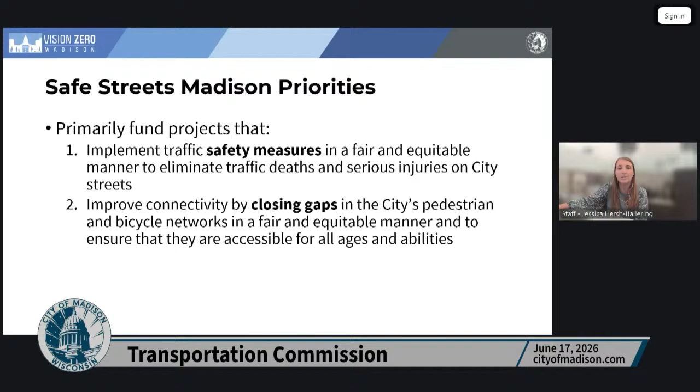The Safe Streets Madison program uses local funds to identify, prioritize, and construct smaller focused improvement projects at single intersections or along a portion of a corridor. These improvement projects target two main concerns: one is safety for all road users, and the other is closing gaps in the pedestrian and bicycle networks so that they are accessible for users of all ages and abilities. Equity is built into these priorities.

Problem locations are then added to our Safe Streets Madison candidate list, and then staff score the severity of the problem, asking questions like: are we seeing severe injury and fatal crashes? Is the pedestrian or bike network gap on a high volume or high speed roadway? And is the problem along a route with high trip generators? Staff then identify a potential improvement to address that problem at every location, and we score the proposed improvement based on how well it resolves that safety problem.

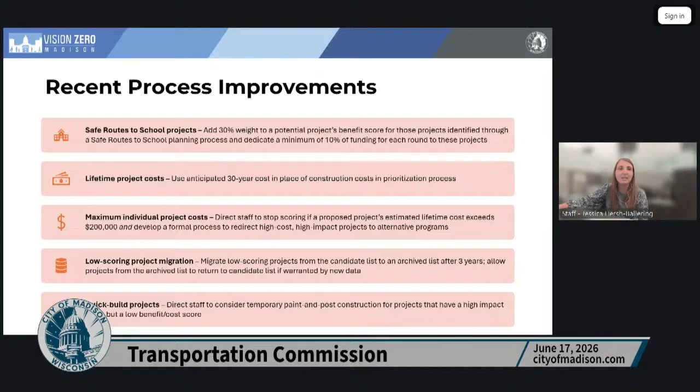Our last process improvement: the TC also voted to direct staff to consider temporary paint and post construction or quick builds for projects that have a high impact score, but a low benefit to cost ratio because of those high construction costs. Typically, these were concrete projects.

So if you look at the recommended project list, you will notice a few quick build projects. The project at Tompkins Road and Groveland Terrace uses flex post bump outs to increase deflection at an existing traffic circle. And at the intersection of Rosa Road, Regent Street, and Anchorage Avenue near Stephens Elementary, we're using flex posts to create intersection bump outs that would shorten the pedestrian crossing and improve safety. Tom's going to go into detail on those projects, but I wanted to mention them here just to note that we did, in fact, include quick builds in this round because of your vote.

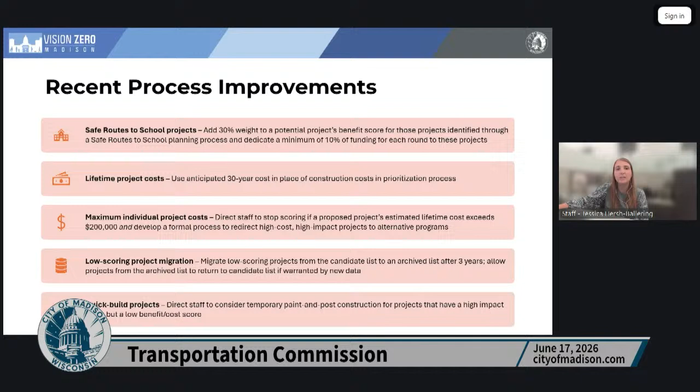I also want to note that doing these projects with flex posts instead of concrete not only makes these projects possible, but it also allows us to complete more projects overall.

Ultimately, that overall benefit score is divided by the estimated 30-year cost of the proposed project. This is also new. It used to be that we just used the initial construction cost, but we voted to have the 30-year lifetime cost in this portion of the ratio.

And lastly, let's talk money. The 2026 capital budget includes just over $1.6 million for the Safe Streets Madison program. When you add in the uncommitted funds from 2025, we have just over $2 million. However, we also have to subtract the estimated costs for approved but not completed projects. These are the projects that the Transportation Commission has approved, but they are still being designed or waiting to be added to an appropriate construction contract.

As an aside, having a significant amount of money that we are reserving for approved but not completed projects is not surprising, and it's not a problem. It's an expected part of the process. As we've discussed, once you guys approve a slate of projects, the additional work that needs to be done before construction typically takes about a year, sometimes longer, depending on the complexity of the design.

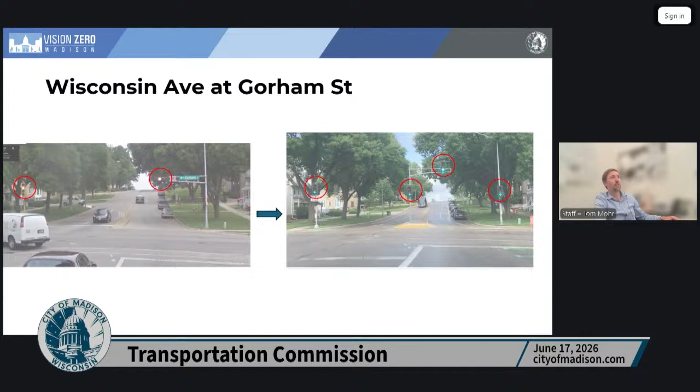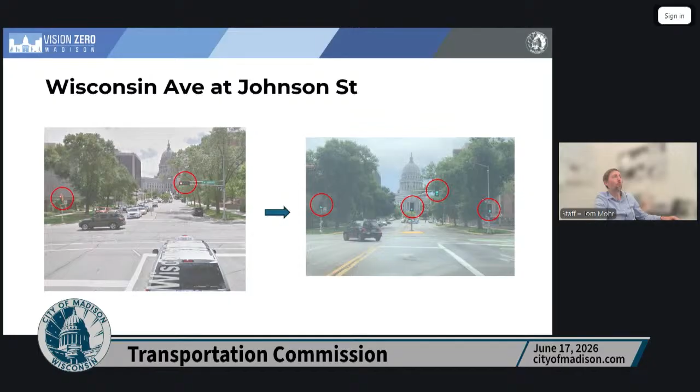This is now looking the opposite direction towards the Capitol on Wisconsin Avenue at Johnson Street. Basically the same thing where we upgraded the signal infrastructure. Next, Baldwin Street, we added bike lanes.

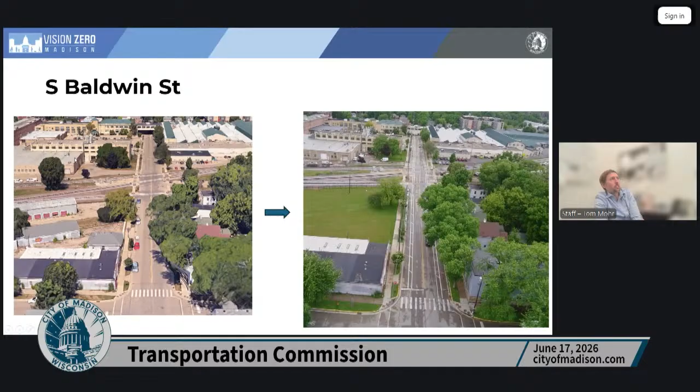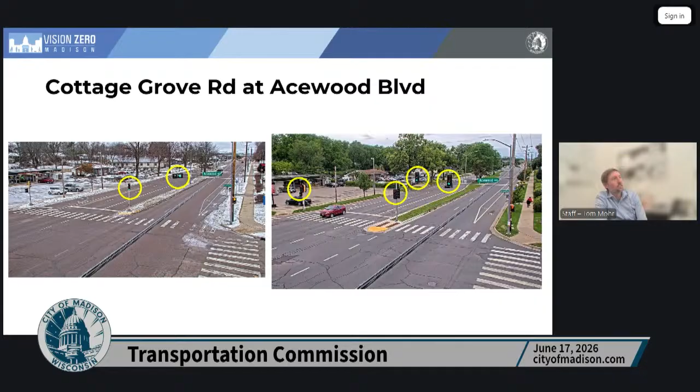We added two projects since this was initially uploaded last Friday. I'll get into both of those, but the 326,000 is a little bit higher than it had been. I'll go through each grouping of projects here.

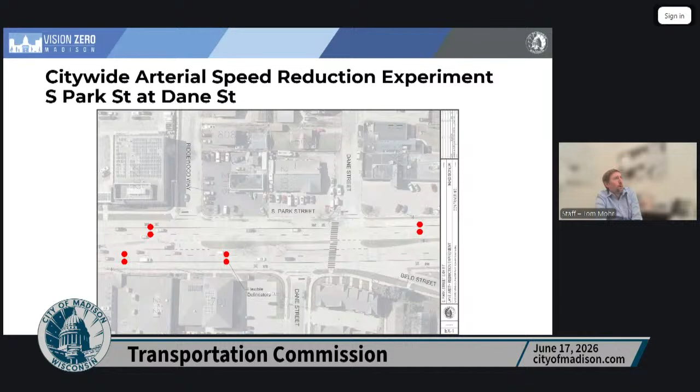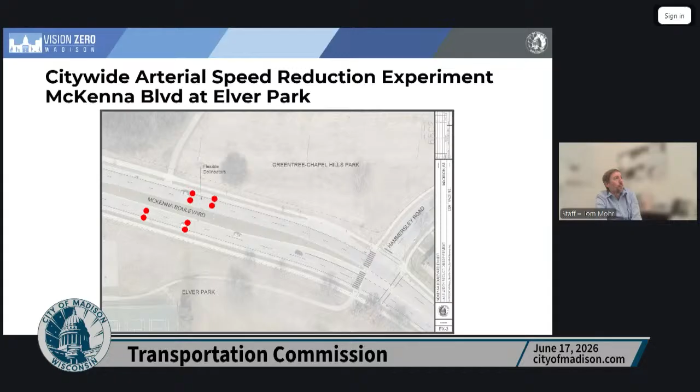This is McKenna Boulevard, just east of Elver Park. And then Northport Drive near Goodland.

Each of these locations weren't necessarily chosen because we thought they were the highest speeding, but we had to choose locations that were near traffic cameras so we can keep an eye on how things are going, monitor the delineators. We didn't want to choose projects that were not visible to us all the time. So we're going to actively watch this while this experiment's going on.

We'll probably keep it up for a couple weeks, a few weeks, depending on how it goes. But yeah, the big thing is going to be looking at the data to see if we want to expand this further.

So we got a few speed hump locations. These locations were typically chosen based off of crash issues. Some of you may remember Swanton Road was discussed in quite a bit of detail about 5 years ago, where

we changed some parking, added islands. We've still seen crashes since then. We've still had speeding complaints. And this is one where we've kind of worked with police, fire, and also Alder Field.

And then this was also identified in the southeast area plan that I think was at the previous meeting. So we've got kind of a dual project here, both on Swanton and on Thompson Drive. A couple speed humps and a chicane.

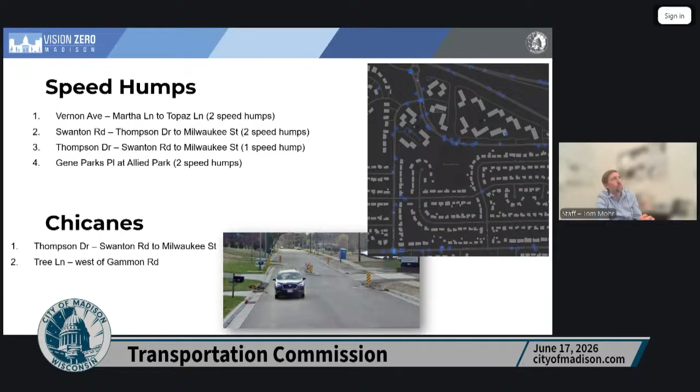I want to call out Gene Parks Place. This is right near Allied Drive. This is part of a neighborhood resource team request.

So this, just wanted to call out, it didn't have the high crashes like the other locations, but because of this location next to the park and there's a lot of kids running back and forth across Gene Parks Place, the neighborhood resource team felt really strongly about this one. So we are including this in this round.

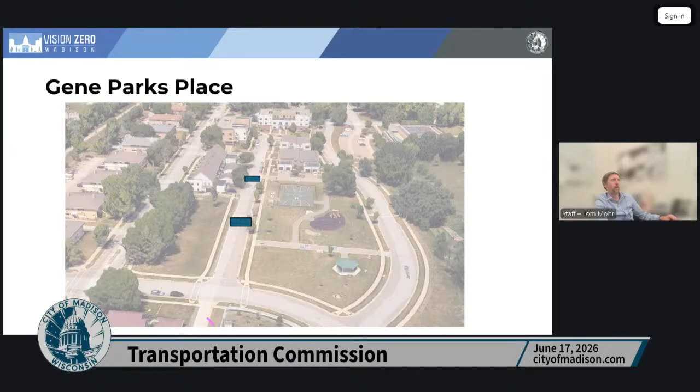For RRFBs, these have always been popular within the program. We've got these locations, 4 locations here, and then 1 location for the speed feedback board, and that's at Park Street near Burr Oak, which we've discussed in the past also. I think I get into more detail here next.

Yeah, so this is, I wanted to go into this one in a little bit more detail to explain this because Monona Drive at Winnequa, so Monona Drive is a 4-lane street, undivided at this location.

So there was some question as to whether we want to continue with RRFBs on these types of streets. I think our stance is that we should continue following the kind of the national guidance on this. This location, it's a difficult crossing for pedestrians. It's near the San Damiano Park.

This has been a long-standing request. There's been a request for a signal here. It doesn't meet warrants. And this is right on the border between Monona and Madison. So Monona has the west side of the street, Madison has the east side.

A pretty long distance between signalized intersections there. So Cold Springs to the south, Buckeye to the north, kind of in the middle. And we've approached Monona about cost sharing on this. Sounds like they're open to the idea, but they still need to go through the formal process for that.

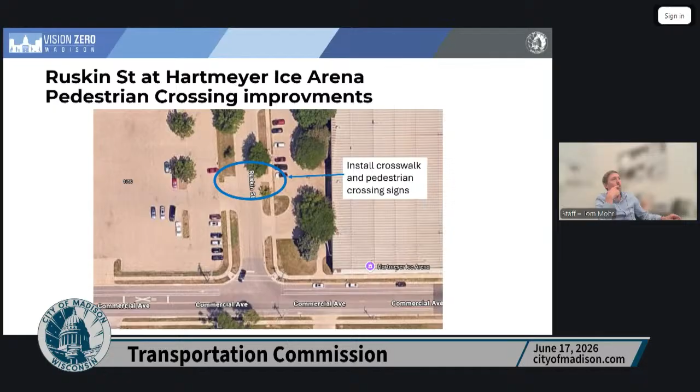The Ruskin Street crossing is for the ice arena. There are events at the ice arena, and there's really no crossing identified that people tend to use. Now Ruskin is a through street, where in the past it was just a cul-de-sac. So we thought it was important to call out that crossing to get people from the parking lot to the main doors.

This is Mills Street, which we've discussed with the Regent Street reconstruction project. The area to the south we had brought previously through Safe Streets Madison, and the area to the north would get bike lanes with the Regent Street project. So now we're looking at the connection. This is on the All Ages and Abilities bike network, so this is definitely something we want to do.

We would have to go through the public hearing to remove the RP3, the residential permitted parking within this area. There are different processes to do that. We thought the best way would be to come here first, get the approval contingent on that RP3 public hearing, so then we'll go through the formal public hearing where we can discuss the rate of use of the RP3 and the effect that would have on that program.

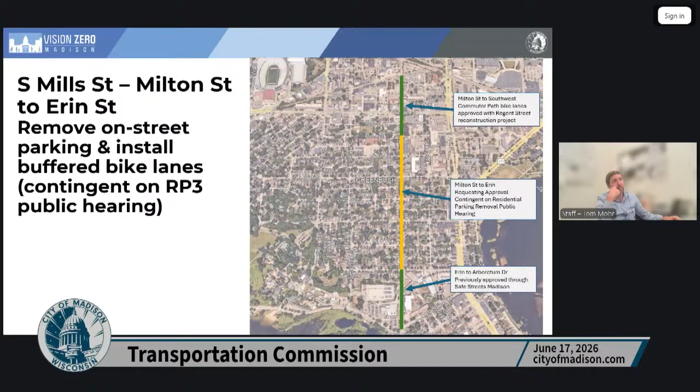But overall, it's a pretty straightforward project. It requires removal of the on-street parking to get the bike lanes in. I think it makes sense to do it now with the Regent, or in anticipation of the Regent Street project. We could possibly even get it in later this summer.

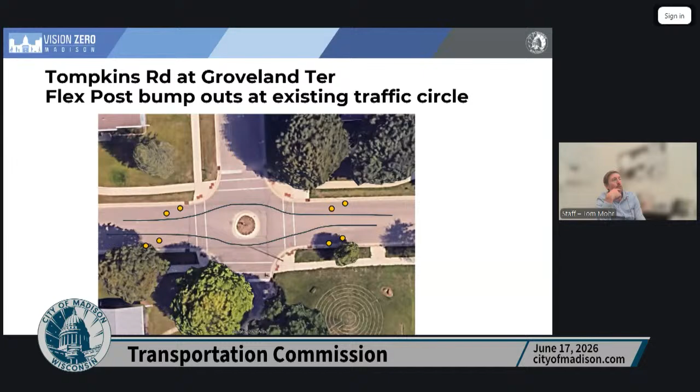This is the flex post that Jessica mentioned earlier, at Tompkins and Groveland Terrace. This traffic circle has been in for quite a while, but whenever we design these traffic circles, they're designed with the thought of there being parked cars on the street. In places like this, where there tend to be no vehicles parked, drivers can just go down the curb line, not really slow down, and avoid the traffic circle. So we plan to add this, especially at this location because of the Flom Road reconstruction, which is going to add traffic on Tompkins. We'll probably look at getting some before and after speed data with this as well, and the delineators will require drivers to deflect more around the traffic circle.

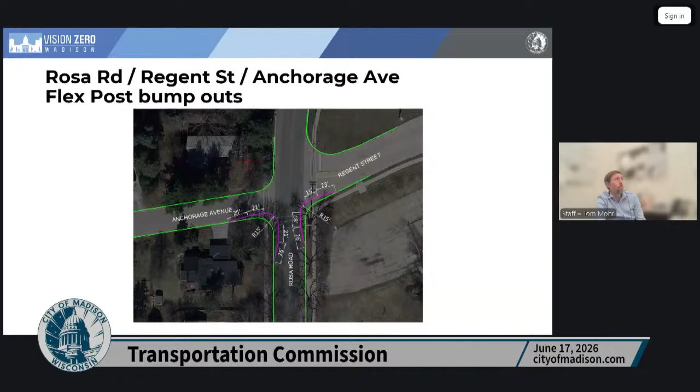So that was the overall list. And we just have the recommended action, but I think that is the end of the presentation.

Yeah, thanks Tom and Jessica. Aiden, do we have anybody registered to speak on this item? Yes, we do. First, we have Nicholas Davies of Richard Street, who neither supports nor opposes but wishes to speak. Oh, actually, I'm sorry, this is for item 3.

So do we have anybody registered for item 2? We do not, nobody for item 2. Okay, alright, then let's go to comments or questions for staff.

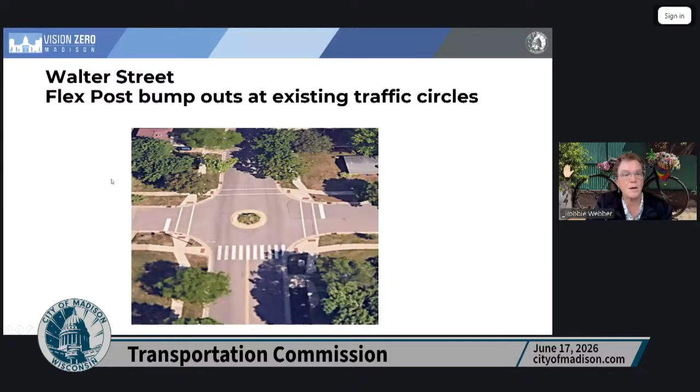Robbie, go ahead. Yeah, I just wanted to clarify that there might be an error on your list. Mineral Point between Segoe and Whitney Way is actually 35 right now, so if you're dropping it down to 25, that's a 10-mile-an-hour reduction instead of a 5-mile-an-hour reduction.

Okay, yeah, thank you for pointing that out. We'll check on that, make sure that's correct.

I mean, the speed limit changes at Segoe. As you go west, it goes from 30 to 35. It also gets super wide. Yep, so I imagine you do have speeding problems there, but just an FYI, it's 35 right now.

Okay, thanks, we might want to relook at that one then. You'd still like the speed reduction? You just want to look at how much, Tom? Right, yeah, yep.

So all these speed reductions are pretty simple projects that don't take long at all. A lot of them are only a couple signs, so we might just want to pull that one and take a second look at it and then bring it back rather than trying to do it here during the meeting.

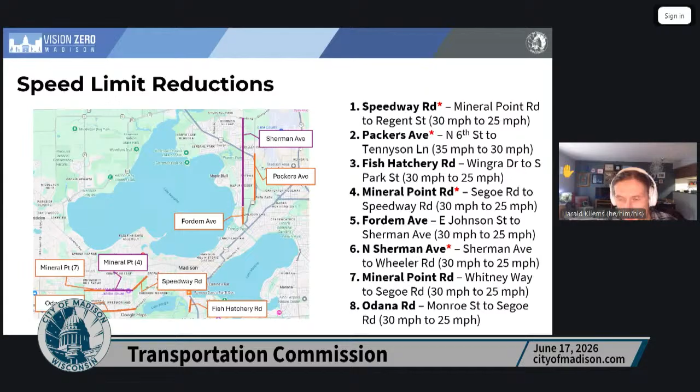Thank you, Chair. Thanks, Tom and Jessica. I'm looking at the overall spreadsheet and the total benefit cost scoring and trying to think about what I'm seeing there. So again, we have a pretty large spread where the highest ranking project is 124, the lowest that's still recommended is like 3, and there's a lot of single digit scores.

It seems like some of the flex post things are those most affected by the 30-year cost, and that's why they end up with such a low cost benefit number. And I think there's also some inconsistency in how the 30-year cost is calculated for those, where sometimes it seems a factor of 20, and sometimes it's a factor of 10 from the project cost to 30-year cost. So I'm curious about that part.

So what's your take on the changes we've suggested with the school stuff? All the high scoring ones are reducing the speed limit, which has a low expected impact score, but it's just so cheap. I think we've seen that before. But for some of the other projects, it does seem like the score distribution has changed a little bit. Can you comment on that?

Yeah, that's a good question. The flex post is a good example where we're not really sure. We're kind of assuming we're going to have to replace it pretty close to every year, but maybe that won't be the case. There's still a question of whether we allow these to just stay up through winter and hope they survive, or take them down to reuse next year. So there's some question with that, and getting them out there and seeing how it goes is going to be important. Really it's just our best guess right now about the long-term cost with the flex posts.

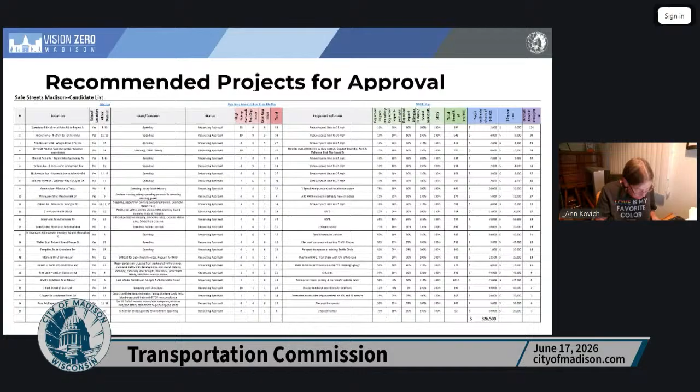Okay, comments or questions? Harald? Oh sorry, yeah, I was going to make that motion to approve the list as you described. Is that in order? All right, Alder O'Brien, is that a second? Yeah. Thank you. Harald, did you wish to speak to your motion?

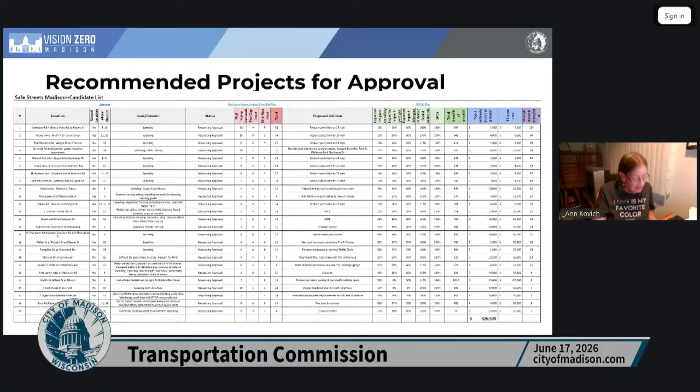It's a good list of projects. Let's get them built. Thank you. And I have a particular fondness for the RRFB on Moreland Road because I live near there, and it's really hard to cross that street. I see lots of kids having a really hard time crossing, so I'm particularly fond of that request.

Okay, any discussion? I'm going to assume unanimous consent vote unless anybody wishes to vote no or abstain. So please raise your hand. Okay, and I'll write that up for Aiden right after the meeting so I don't forget from my scratch notes there.

All right, thanks so much everybody. These are great projects, and as we all know, there's many Safe Streets Madison projects on the list, right Tom? So it's great to see these. I think one of the benefits of the changes we approved back on April 15th is that we will likely see more projects because we're pushing the higher dollar ones off in other directions, so we're able to accomplish a little bit more. I also think the Safe Routes to School enhancer is really helping with those projects as well. Thanks to staff for bringing those enhancements forward, and it's really great to see them used this very first time. So round of applause to staff. Thanks everybody. Yep, thank you.

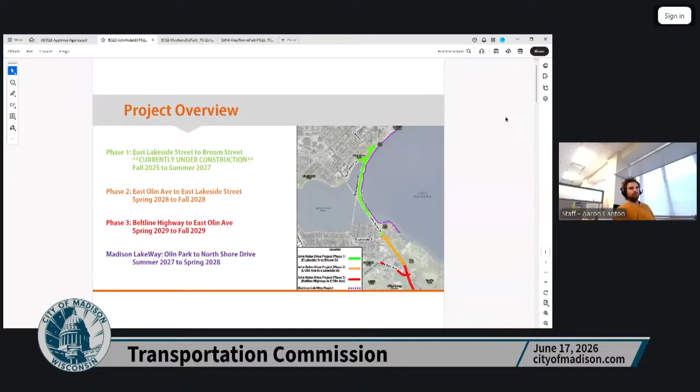Does that look any better? Well, I think you've just got the slides, but we still see your taskbar and everything. If you just make the slide full screen. Oh, here, I can also zoom in too. That might help. That helps. Okay. Well, certainly let me know if anything needs to be zoomed in as we go.

So thanks everyone. This is the John Nolen Phase 2 project. Bringing this informationally to the commission. Likely we'll be back with full geometry approval at a later date.

So shown here is an overview of all the phases, current and future, for John Nolen Drive. Phase 1 is in construction along the causeway. Those limits are just north of Lakeside Street through the Broom Street intersection, currently under construction. Progress is going well, expecting a significant phase switch to start work on the Lake Monona side, likely next month in July.

That project is going to be continuing construction through summer of 2027. Phase 2, the focus of today's meeting, will be from just north of Olin Ave to north of Lakeside Street, and that is currently scheduled for 2028. Phase 3, scheduled for 2029, will be John Nolen from the Beltline through the Olin Ave intersection, as well as Olin Ave itself from Wingra Creek to John Nolen. And a note that Madison Lakeway is planning a portion of their park enhancement along the Lake Monona shoreline 2027 through 2028, on the coattails of the engineering project on the causeway.

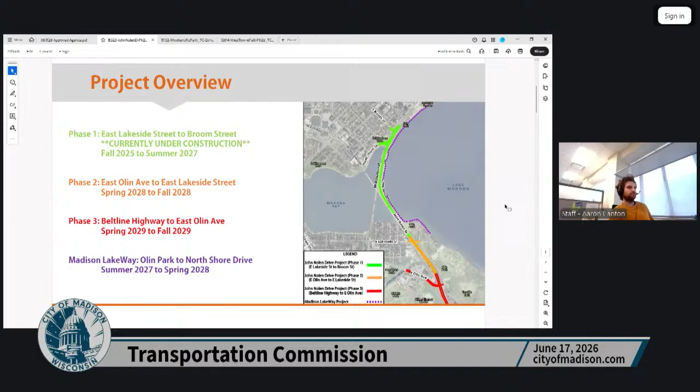So for phase 2, the focus of today, this is an overview exhibit, roll plot for that whole phase. It's a bit smaller and less to chew on than the first phase, which had a lot going on, but still obviously a significant street. The project will include pavement replacement across the full stretch. The limits are going to be north of Olin Ave, so this phase won't get into the Olin Ave intersection, and then through the Lakeside Street intersection, tying into where phase 1 will leave off. This phase 2 will include the Lakeside John Nolen intersection, which we'll look at a zoomed in exhibit later in the presentation, as well as the Sayle Street and Lakeside intersection.

So in general, the project is largely motivated by pavement replacement. That pavement is beating up faster and faster every day, and we need to get that replaced. There is one bridge structure on the project over Wingra Creek. That bridge is actually in pretty good shape, and we're planning for some surface level and wing wall repairs, but not a full replacement of that bridge. In general, the project is planning to put back the same number of lanes that exist out there today on this phase. The lane drops will be brought up to current WisDOT design code, elongating slightly per the standards. And then we also have some bike and ped improvements, largely at the Lakeside intersection, that we'll get into.

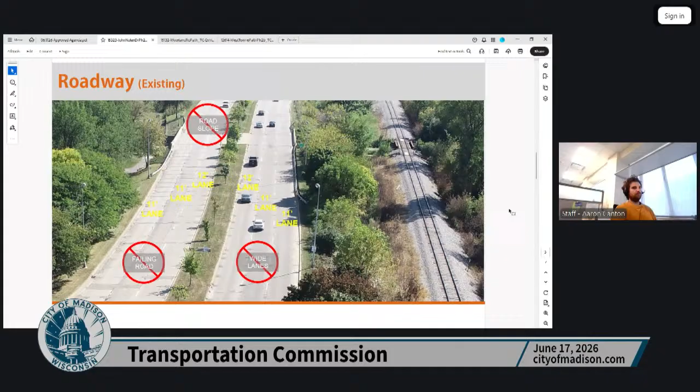So zooming into it, first off, a look at the existing roadway. It's, as much of John Nolen does, has that highway feel with wide lanes, more typical on highway, cross slopes that are typical to larger roads. So we're looking to urbanize the street, similarly continuing the work of phase one currently under construction. So today there are 12 and 11-foot lanes, some excessive pavement. We are looking to narrow those to what has been pretty city standard on projects like University Ave, have a 10, 10 and a half, and 11-foot lane, overall reduction of 5 feet of pavement that we won't have to build or maintain over time, and allows for increasing the green space, particularly a median for the existing or proposed trees.

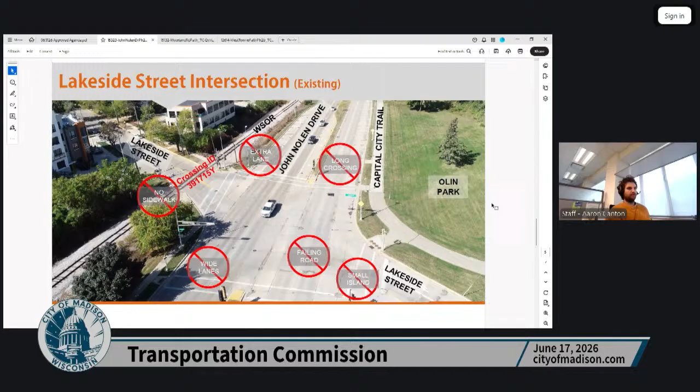And then looking at the Lakeside intersection, similarly has that very highway feel, significant pedestrian crossings, lack of sidewalk on Lakeside, on the south side, some extra lanes that can be modified. And so zooming in here...

As discussed, existing conditions show there is no sidewalk on the south side of Lakeside between Sayle and John Nolen. With our railroad coordination for this project, we'll be extending panels as needed and adding some additional widened sidewalk, in the 7 to 8 foot range on the south side, widening it as much as we can given the right-of-way constraints and the space needed in the terrace for the railroad gates and signals.

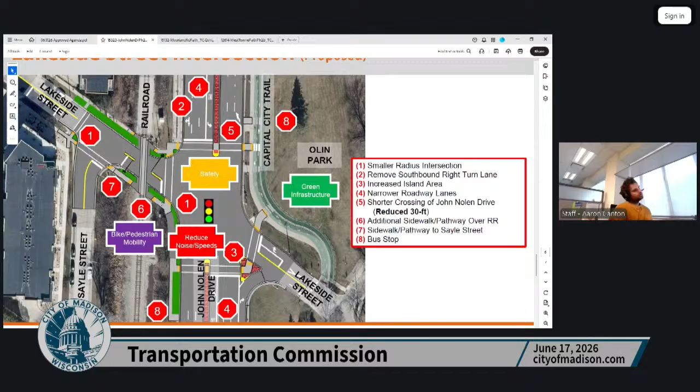Furthermore, we'll have new signals and lighting along the whole project limits, bringing everything up to code. Zooming in a bit more at the Sayle Street and Lakeside intersection, we're looking to tighten this up as much as we can, bringing in this corner a bit to widen out those curb ramps and neck down the intersection.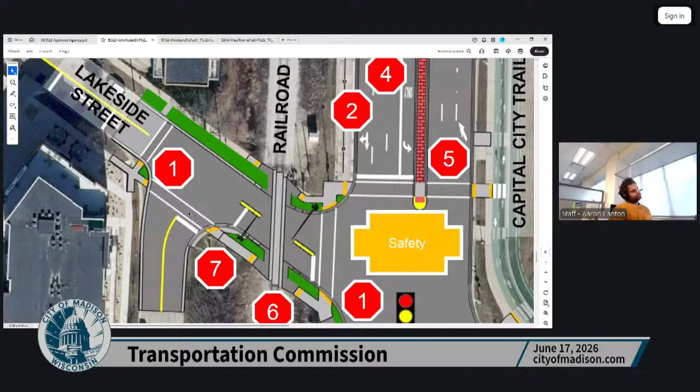There is a limit to how much we can tighten this intersection given some larger trucks that are turning in and out, going to the traffic engineering shop down Sayle Street. So we tightened it up as much as we can, given those larger vehicles.

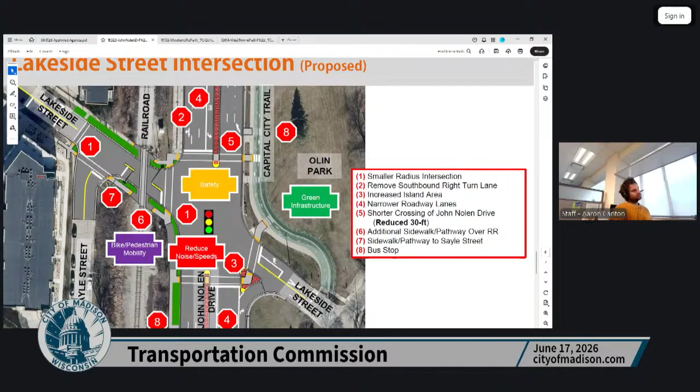We're also anticipating needing some hard medians on Lakeside on either side of the railroad tracks. So given those constraints and working through what type of vehicles go through there, we've tightened that up as much as we can here, and have also included a small truck apron on the southeast corner at Sayle and Lakeside to help accommodate the larger turn movements.

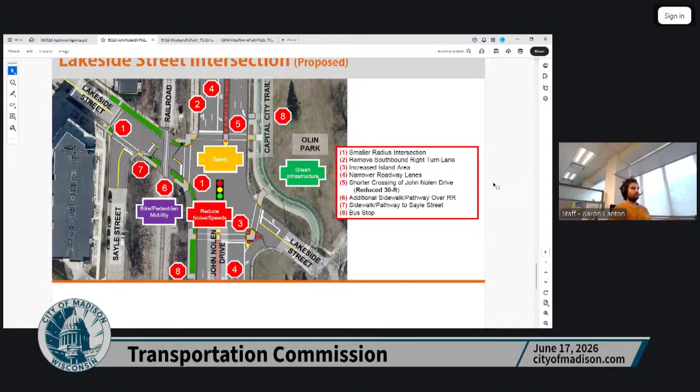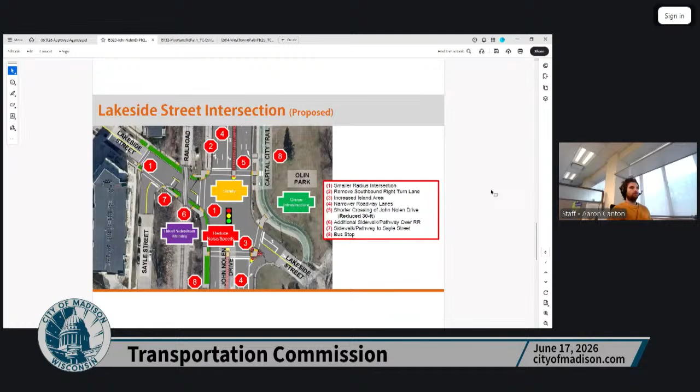That is the overview for Lakeside. Moving on to some of the bike-ped or pathway connections—let me zoom back a little to the overview. We had looked at a bike path connection on the west side of John Nolen, and given Sayle Street as a pretty good bike connection between Lakeside near John Nolen and the underpass under Wingra, we focused on looking at a connection on the west side of John Nolen from Wingra south to Olin Ave.

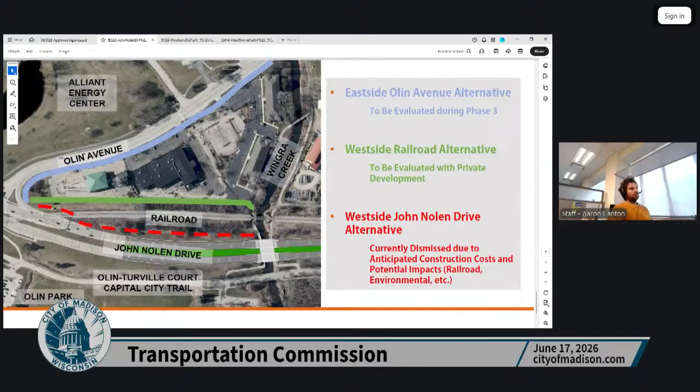Apologies for jumping around a little here. We took a look at this red line and what it would take to build that path connection, which would largely serve future development in this area. Although it is feasible, the cost estimate was quite high, given it would be built within a pretty substantial railroad ditch, requiring large retaining walls on either side. We took a good look, but it's somewhere in the range of $600,000 to $700,000.

That was beyond the federal funding we had for this project, so at the moment we've dismissed that dashed red alternative and instead are looking at the green and bluish lines. With future development anticipated between John Nolen and Olin, there would be an opportunity to get a path connection on the backside of those developments, the green line, connecting to the existing Wingra Creek path underpass, which would probably be the most direct connection for those developments.

That will obviously have to come with time as things change and develop out here. The other option is the bluish line, creating a widened sidewalk or path on the north side of Olin Ave along those future development areas. That's something that could be evaluated during phase 3, which will include reconstruction of Olin from John Nolen to Wingra. This section of Olin is maintained by the county, so phase 3 coordination, starting soon, will include coordination with the county.

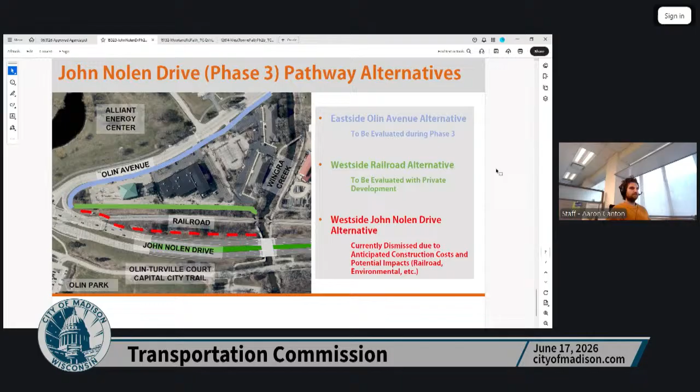That is the summation of the John Nolen phase 2 project. Again, we're looking at construction in 2028 for this, immediately following phase 1 completion.

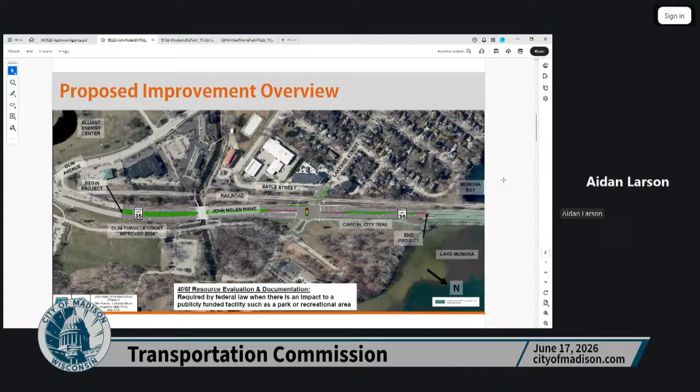Thanks. Yeah, I think this project does include some improvements compared to current conditions, but from looking at the design of the Lakeside intersection, I'm just not clear how I would be expected to navigate that on a bike.

To the west of the intersection, cyclists currently ride on street, and to the east, Lakeside has on-street bike lanes. So it seems to me that the simplest and probably cheapest option would be to continue the on-street bike lanes in either direction to and through this intersection.

I mean, is that what the Netherlands would do? Probably not, but they'd be in the context of a whole different system. Is it what France would do? From recent experience, I would say absolutely.

Alternatively, if cyclists are expected to navigate this intersection as path users, this looks like it'd be very long and complicated. If you're going eastbound, you'd be on street to start, then make a right turn onto the southbound segment of path. Then go left across John Nolen Drive in the south crosswalk, stop in the little triangle, make an abrupt 90-degree turn, cross north across Lakeside to join the Cap City Trail, go right if you're continuing southeast, where you join Lakeside again and go left.

Likewise, if you're headed westbound, you'd probably turn right off of Lakeside onto the Cap City Trail, turn left to take the northern crosswalk leg. That leads you to a little bit of path that makes a 90-degree turn to the left, and then you're facing 120 degrees away from Lakeside Street, which may be a very challenging turn.

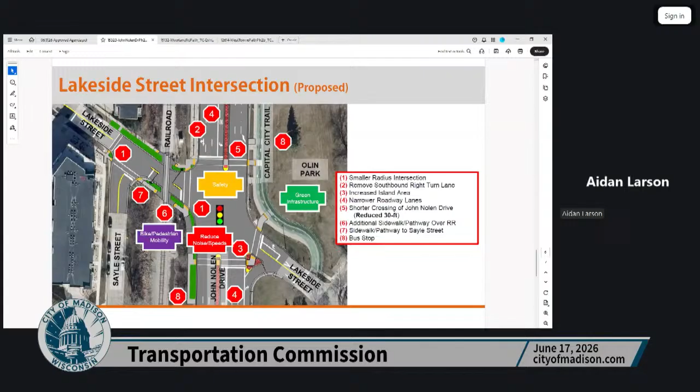Hello. So I live, or used to live, very nearby on Sheridan Street and heavily use this intersection as both a pedestrian and a cyclist. And I really appreciate the pedestrian improvements. 30 feet less is pretty awesome.

At the same time, there's certainly more that could be done, especially when we think about, as Nick noted, there's really not a great way to interact with this, even this new intersection, as a cyclist either. Ideally, there would be a plan to have infrastructure on Lakeside Street.

I don't know if that's ever going to be a possibility, but we should be trying to accommodate cyclists in some way, even if it's, for example, since a lot of people move up onto the north side sidewalk to connect to the Cap City Trail, facilitating that with a widened sidewalk and some sort of connection at the Sayle intersection could be at least a small compromise to accommodating cyclists versus what's currently planned there.

And there's plenty of room in that intersection. It's huge, so it should be possible to get a few more feet for a wider intersection there. So that's basically what I'm trying to say. Thanks for working on this. This is certainly an improvement, but there could be more done.

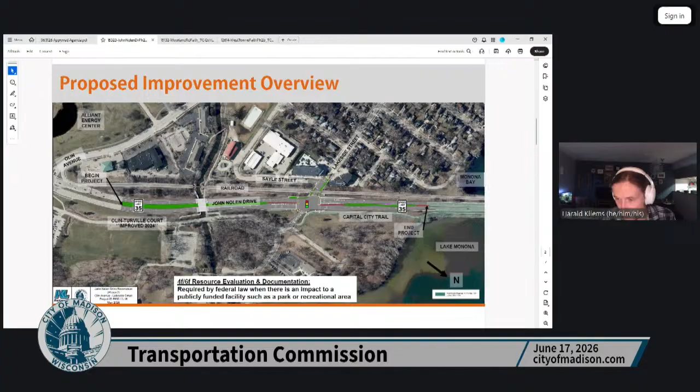Okay, different topic. The west side, the path alternative. If you don't mind going to that slide.

Is there any possibility to get a bridge across Wingra Creek if that green alternative gets built, to have a continuous connection from Sayle to path to new path? Probably not with this project, but definitely a possibility in the future. Bridges are expensive, but as you plan the project, keeping that in mind, I think that would be a great connection. Yeah, that's a good thought.

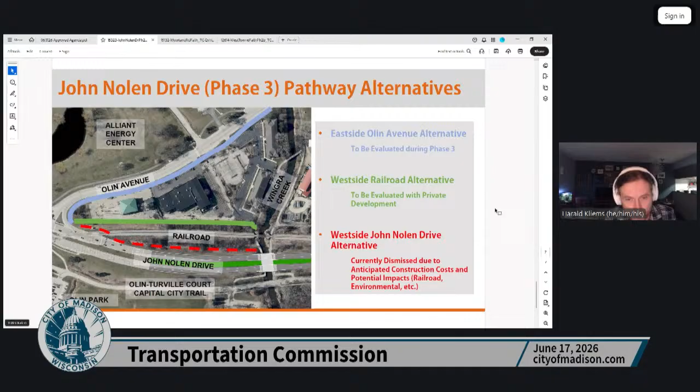And then can you go back one slide up to the intersection diagram. I think, Aaron, you had mentioned hardened medians. Is that at the railroad crossing, like the yellow things? Are those hardened medians? Did I understand that right?

Yeah, I may have misspoke there. I'm not totally sure what is going to be there, but we anticipate some sort of median. It may be something mountable to make truck turning movements a bit easier, or it may be something hardened, which is what we've been seeing with similar railroad crossings in quiet zones, like at Willie Street, recently put in on Broom Street. So some of that is a little bit TBD on the railroad coordination. We will work to minimize how much median is needed there, but we do need the railroad sign off and approval to get the project funding. The point is to discourage people from driving around the gates with those. Correct. Okay, thank you.

In this chart, a lot of people talked about bike movements, and based on the diagram, the most awkward one is the northernmost crossing. If you come from Cap City, cross in the pedestrian crossing, and want to continue onto Lakeside, that seems awkward in terms of angles. I know there's the gates and that might be challenging, but that seems like the most awkward movement to make, so looking if that can be improved would be great. Yeah, that's a good point. I've made the comment myself on just making some smoother turns, getting rid of the hard right angles, and widening any sidewalk we're building as much as possible. It's the restriction of the railroad gates and the lane width needed for truck movements, so there are restrictions, but we can make it as comfortable as we can given them. Thanks for all the work on this, appreciate it.

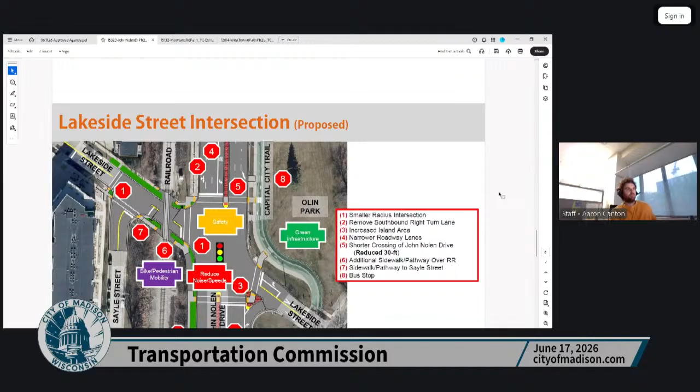So those are not at this point a part of the project, and the Wingra bridge is not fully getting replaced, just kind of surface level partial replacement along the wings and the surface as needed. I was just going to ask because one of our written comments noted that on the northeast side of John Nolen Drive, those turns are about 90 degrees, and was wondering if there's potential for change.

But if they're not part of the project, then it's not really relevant. Thanks, Alder. Pepe, go ahead. Sure, thanks Chair, and thanks Aaron. Aaron, would you mind going back to the slide, the one with all the colors and the numbers showing the intersection in Zoom?

Awesome. I'm going to try not to reiterate all the other questions that have been asked. I think they represented a lot of the questions that I had. I still have one remaining.

So this is something that has happened to me a lot because I live in the neighborhood. If you are biking on Lakeside Street eastbound, on the left side in this case, and you cross the railroad and want to wait for the green light to cross and get onto the Capital City Trail to go to the city—if there are no cars there as a cyclist, I'm just not sure if the sensors on the street recognize you to call for the green. So I've had to just choose to bike on the sidewalk and press the button instead, because it would otherwise take very long. Are you guys considering what kind of sensors are going to be there? Is it going to sense a bicycle, or is the assumption here that a cyclist wanting to make a left turn from Lakeside onto the Capital City Trail towards downtown is supposed to hop on the sidewalk?

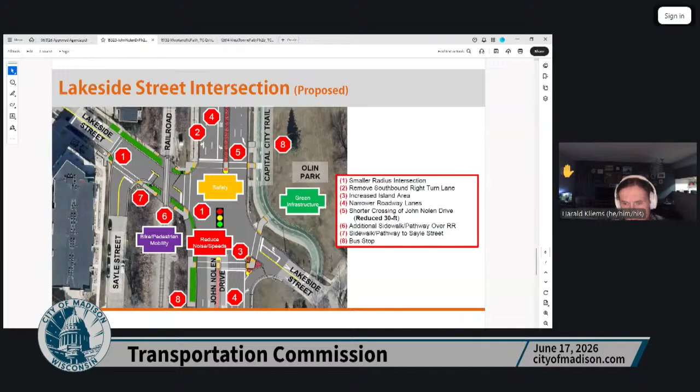Is there a northbound bus stop? There is, yep. Right here, right by the 5. So pretty close to where the existing one is. There's an existing pad there, just moving it slightly. Okay, oh yeah, I see the 8 for the bus stop is in the lawn. Okay, I guess that makes sense. Yeah, okay, that seems like a fine position, and close to the crosswalk and all that.

All right, thanks, Harald. Other comments or questions? A lot of great discussion, a lot of great feedback. Any last questions from staff for TC members? Aaron, Chris, Tom, you all have what you need? Yes, this is great. Okay, all right, last chance? Okay, thanks everybody.

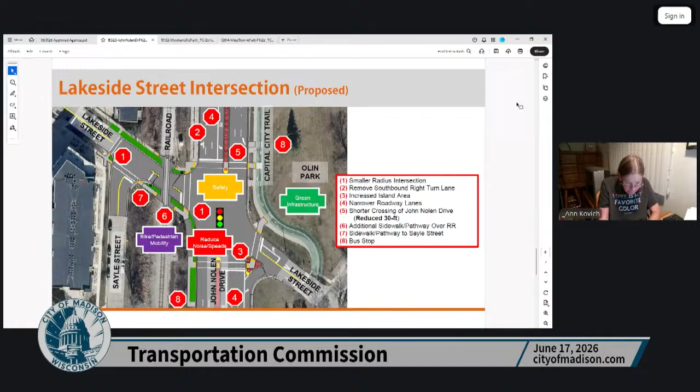So Aaron, are you doing this one as well? Yep. Okay, you're stuck with me for this item and the next one. Yeah, okay. No, I attended your last public information meeting, which was very, very informative and helpful since, again, this is in my neighborhood. So go ahead. Yeah, I appreciated you being able to make that.

And I believe Southtown Road is City of Monona. So this is a stretch of Moorland that does not have any existing sidewalk. It has on-street bike lanes, but is lacking in pedestrian and safe bike facilities, especially important given the location of an elementary, middle school, and neighborhood center just to the west on Rimrock Road.

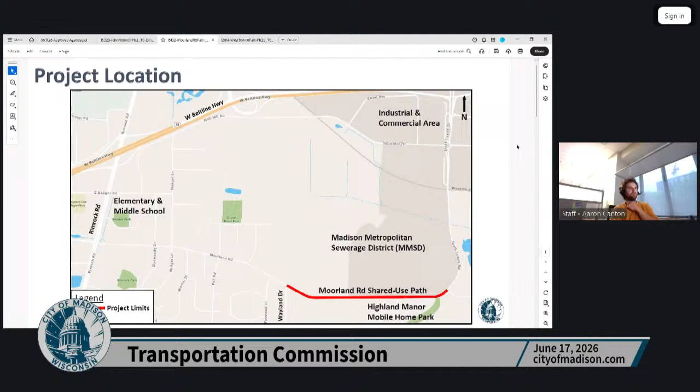So there are some constrained areas to work in, but essentially what we're proposing is to remove the on-street bike lanes and majority of the on-street parking, shift the south side curb into the street, leaving a 26-foot wide street with 2 11-foot travel lanes, which is the minimum for a street with transit in both directions. Shifting in that south side curb and installing a 10-foot shared use path for bikes and pedestrians provides an all ages and abilities bike route, as well as a pedestrian facility on that south side, with grass terrace space between the path and the street.

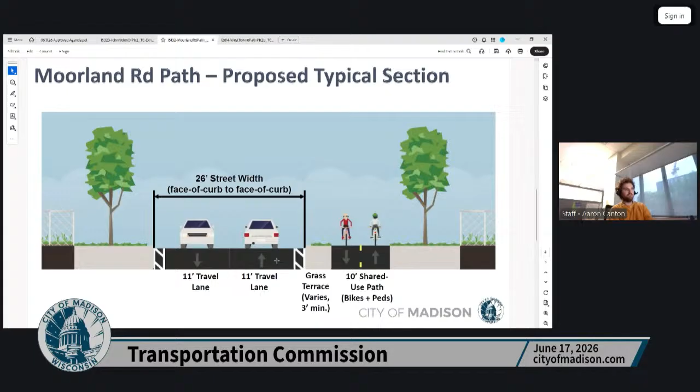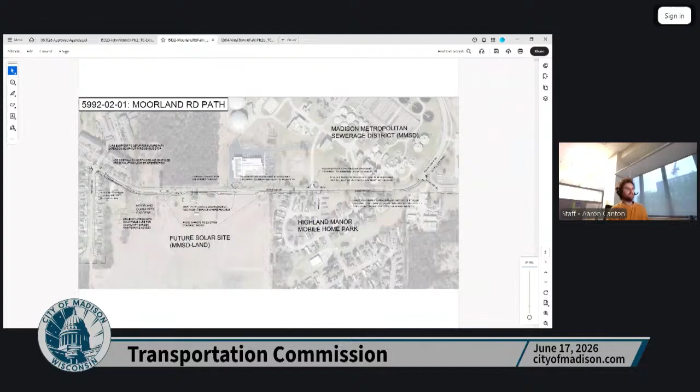In the constrained areas, we're looking at 3 to 4 feet of terrace; in other areas where there's space, a bit more. Zooming out, we've got a big overview exhibit here that I can quickly run through, starting on the west side. So the project limits start at the Wayland Drive intersection.

I'll mention the Safe Streets project that was just presented included an RRFB across Moorland at the intersection just left of Wayland. But this project, we're planning to redo the curb ramps at all 4 corners at this intersection, shifting in that south side curb.

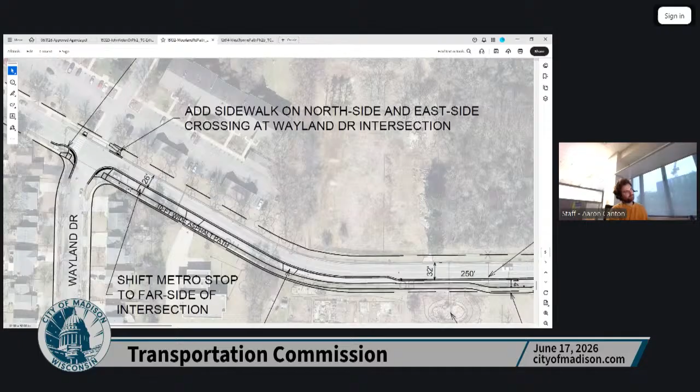There's a bit of sidewalk here that will be replaced with the 10-foot wide asphalt path. Here there's some ample room for a pretty wide terrace. I'll also mention setting up on the west side of Wayland Drive for the potential continuation of some sort of path on Moorland Road, at the very least creating a safe crossing to get across Wayland here.

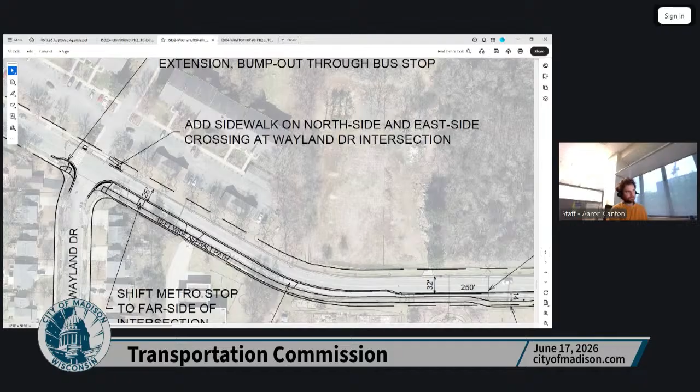Essentially the cross-section of the 10-foot wide path continues. We've got some community gardens here, and I've been in contact with them about the project. They're probably one of the largest drivers of the need for on-street parking on Moorland here. So we're proposing a parking pocket on the south side of the street where we've got some space to fit that in.

We're moving the parking area outside of the bend to keep that bend narrower and keep speeds lower. There is a history of crashes at this bend, so we're moving the parking pocket onto the straight tangent section.

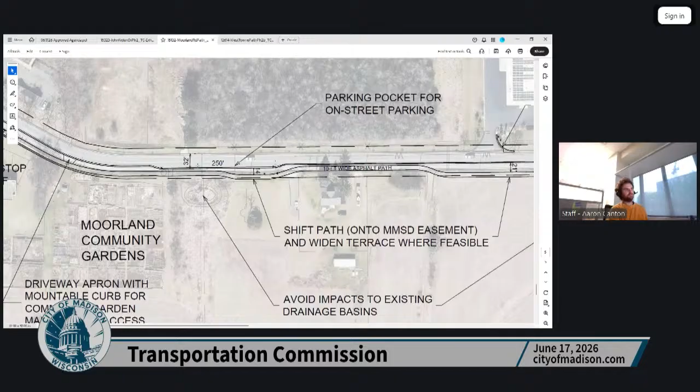In this existing cornfield area, it's actually getting redeveloped into a solar site. It's owned by MMSD, the sewage district, and they've recently gone through a redevelopment process to install a solar field here. With that redevelopment, we were able to get some easements, permanent and temporary, for grading of the path, which allows us in some spots to have a wider terrace and shift the path back rather than being constrained to just the existing street footprint.

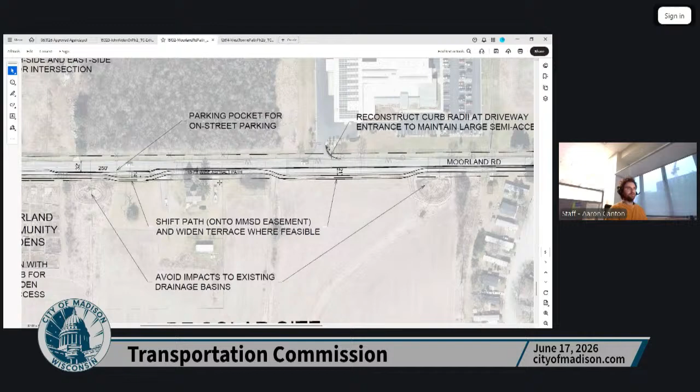There are some bioretention areas that we're looking to avoid to not have any stormwater issues on either side of this farm field site. There are also some larger canopy trees existing in this area that we are looking to avoid. This house is gone, and I think it will be part of the solar site, but the large trees there are still around. So we'll be preserving trees where we can.

As we continue to the east, as we get to the mobile home park area, this is where we have a constrained section with poles and trees directly behind the curb. So we've got a narrower terrace here, maintaining the 10-foot wide path, and some modifications to a bus stop right by Manor Drive here.

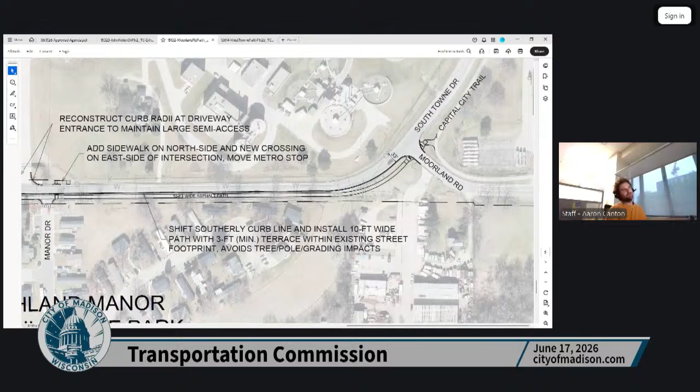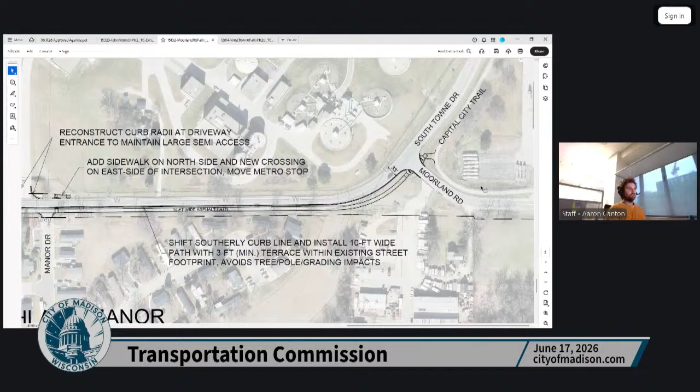Continuing to the east, we'll have the path connection to the Cap City Trail, which can continue north into downtown, or east to the Lake Farm County Park, connecting to Moorland. That's pretty much the summary of the project. At a public meeting, it was well received by the neighborhood. Like I said, we have some federal funds through the Transportation Alternatives Program, and we're looking to get this constructed in 2028. So yeah, I think that's it.

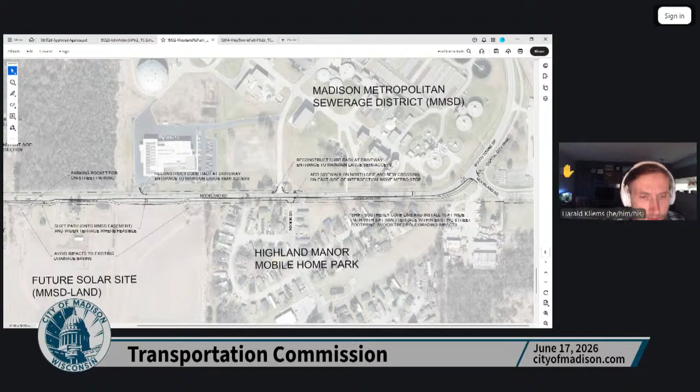Since you mentioned the solar development, somebody asked me a while ago if there are any plans for a north-south connection, like somewhere to get from Wayland or Moorland down to the Baxter Spur Trail. Because if you want to go north-south as someone walking or biking, you have to go over Wayland, Engelhart, or Fell Road and then back, so it's pretty indirect. I heard there's a big farm field that's going to get redeveloped, and now it's going to be a solar farm. Is there any thought of maybe having a path connection north-south there?

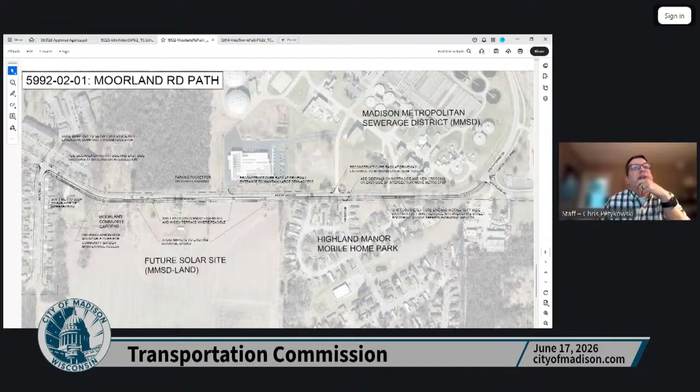Yeah, that's a good question. There has been thought about that by myself, discussion about that, and I can't recall exactly. Let me see if I can jog my memory. I know Don at Traffic, we were talking about some kind of connection down there, and I think there's a bunch of easements that are possible that we could connect to. So yes, we have talked about it, but I don't think we have a plan formulated at this point. I'll bring that up again. I meet with the district a bunch on other stuff, so we could bring that up.

Yeah, I don't think it affects the design of the path because it would be perpendicular. But I'm just thinking in terms of connectivity. That connection wouldn't have made sense without the Moorland path and vice versa. So yeah, I think looking into that would be great.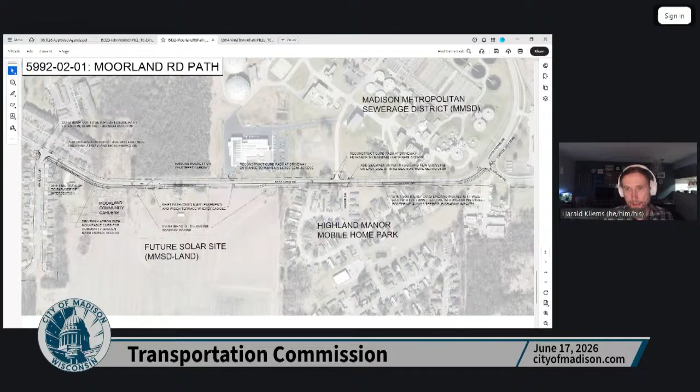Would you mind going to the eastern end? I'm just thinking about tying into the Cap City Trail, you know, there's a turn there, some gradient. I guess maybe just take a look at where's the best spot to tie into the Cap City Trail. Will it make sense to offset it a little bit one way or the other in terms of speed and visibility? I think the way you have it is probably pretty good, but yeah, just thinking about it, there are some gradients and turns and people cutting corners. So that's all I have.

Yep, definitely thought about that connection. I will still tinker with that a bit. It's a little bit of a sharp spot, but whatever we do there, we'll keep it extra wide with wide radii to make those curves smoother.

And since you're rebuilding the curbs there, I guess that's possibly also an opportunity to tighten up the intersection, because there have been some crashes at South Towne and Moorland there. Yep, we can look into that as well.

Other comments or questions? This is a very dangerous stretch of road, so our neighborhood very much appreciates this. There are places where there are not sidewalks on Moorland Road, and it's very, very dangerous. Lots of kids, lots of people walking and biking, so we're really looking forward to this in the neighborhood. And what you suggested, Harald, about that other connection, that would be really super to have rather than having to go way around as you were describing.

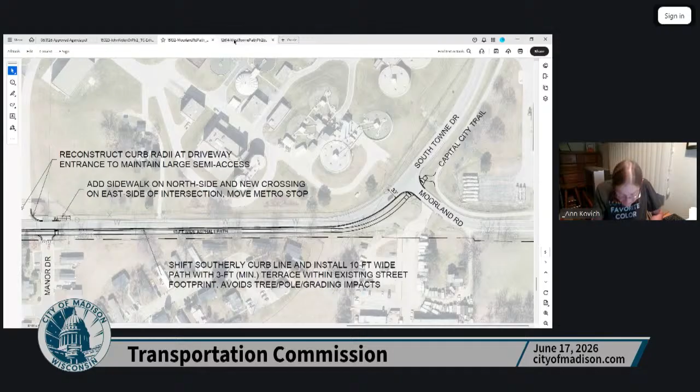Yeah, getting right into it. This is another exciting path connection, a long time coming, looking to fill a pretty significant gap in the West Towne Path corridor. It's been filled in, I'm sure folks are aware, over many years, over different phases. So this is an exciting, you wouldn't say last phase, but big piece of the connection.

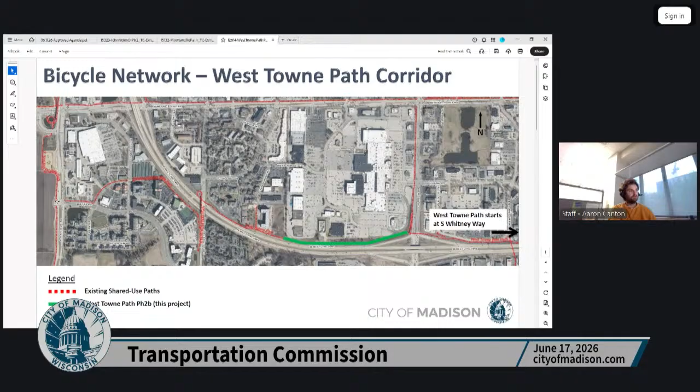We're calling it West Towne Path Phase 2B. Phase 2A was completed, I think last year, around a new development at Zor Shrine Place. Phase 2B will be the green line to connect from what was recently completed to the Gammon Road underpass. Then you will have a full path connection on the West Towne corridor starting at Whitney Way on the east end all the way through to High Point and Junction Road, so definitely going to be big for the west side and far west side. Here are some recent pictures from the completed Phase 2A.

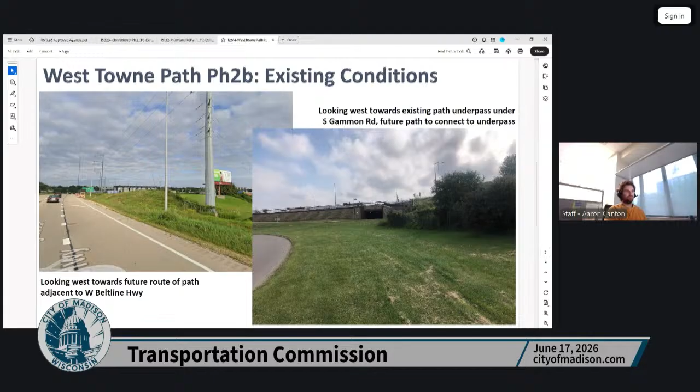So here's an overview schematic for the project. Zooming in a bit, starting on the west side, we'll be continuing the 10-foot wide asphalt path with lighting throughout what was previously built.

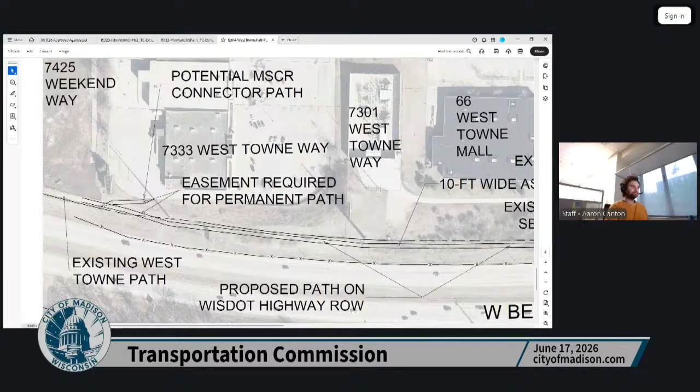We're working with MSCR, who owns the site at 7333 West Towne Way. They are excited about this path connection and are working with us on an easement needed to fit this in. They also want a connector path to get directly to their site, so we'll be working with them on that as well, something to get directly into their parking lot.

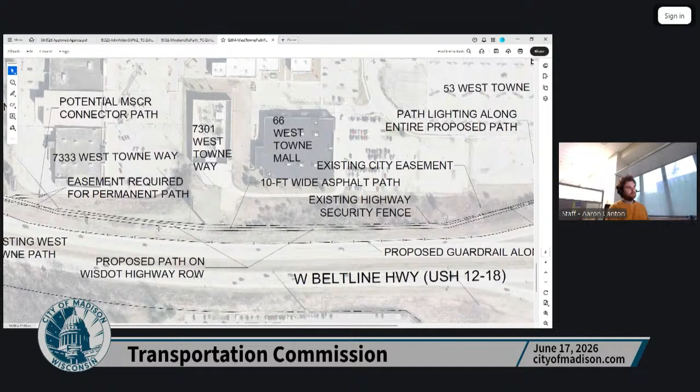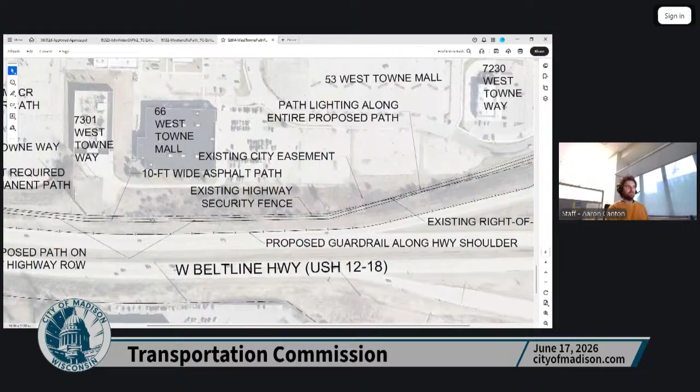And then there's a pretty steep slope here. The path will climb up that slope into the WisDOT right of way, where it will continue following along the northern edge of the WisDOT right of way, along those ATC poles. Continuing in the highway right of way, this is kind of the top of the hill slope. This is the Urban Air Trampoline Park for reference.

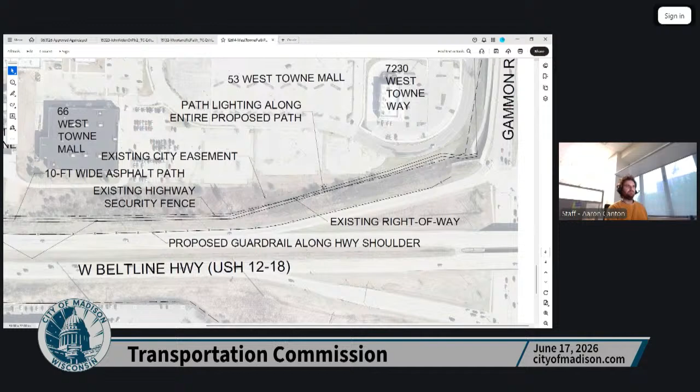Continuing to the east, the path will come down in grade and take advantage of an existing easement that we have at this site around the Portillo's, coming down to grade and then connecting into the underpass area.

We are likely going to be adding guardrail along the Beltline Highway shoulder along this whole stretch. Currently it's just the open clear zone, so there's no guardrail or barrier there. So we'll be adding that with the path. There will be a retaining wall through much of it, again looking similar to what the previous path looked like.

We'll largely be building on easements that are in the works or already established, or on WisDOT highway right-of-way, with potential for some temporary easements needed from property owners, and we'll work with them as needed. This project is receiving federal funds as well. It's actually going to be a DOT-led contract, and we're expecting construction in 2028. Yeah, I think that pretty much sums it up.

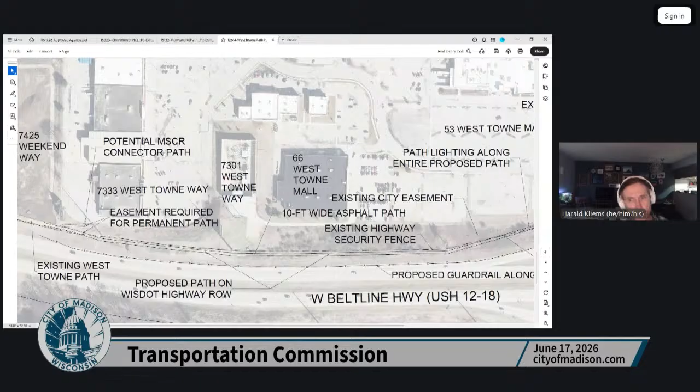A question to which I probably already know the answer: how to get from the path to the mall, other than, I guess, the MSCR connector, but closer to Gammon. Presumably the mall doesn't want that, and therefore we can't build it.

Yeah, so I could jump in a little bit here. We had some initial talks with the eastern parcel owner here, I guess it would be 53 West Towne Mall. They were pretty much generally interested in creating a connection, but we're not going to necessarily tie our project to it. If we can get their cooperation, we'll do it.

You can physically come along Gammon Road there. There's a connection, if you go north on Gammon Road, you can get yourself back down to grade kind of in that Portillo's area. What we do also expect is whenever any of these pads, you can see there's 3 pads there that are undeveloped right now, when those come in for development, we would have them build a connection as well. So we'll definitely have 2, maybe a 3rd, and then most certainly more in the future as things develop.

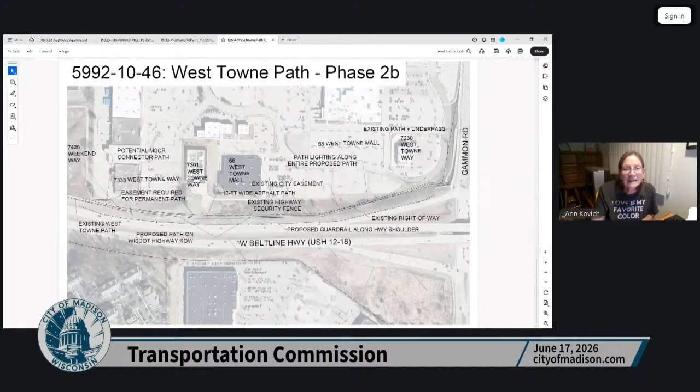All right, okay. We're having a big storm at my house. I don't know if anybody else is having lots of thunder and lightning, but we have lots of thunder and lightning. Hopefully my power is going to hang in there, knock on wood.

So we move on to item number 6, which is election of chair and vice chair. A couple of reminders: the Transportation Commission ordinance does allow for an alder to be chair, co-chair, or vice chair. And per the city attorney's office, alternates cannot be selected as chair or vice chair. So those are the two big reminders.

For some reason I have to ask it three times. Are there any other nominations? Last call for any other nominations. Okay, is there a motion to close the nominations and select the chair? And we do need a second required for that. Robbie, move to close the nominations and unanimously vote for Ann as chair.